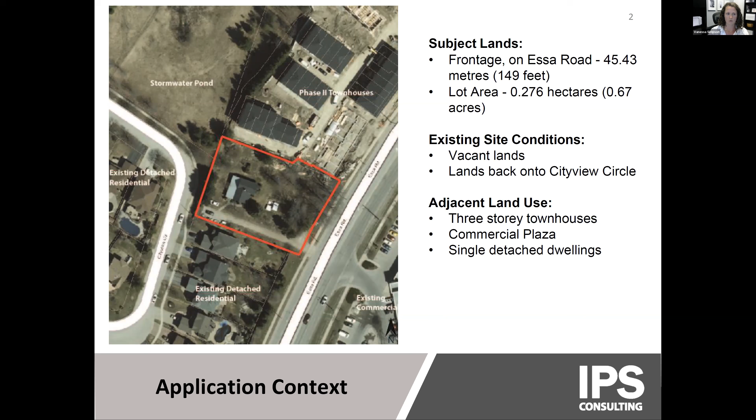As Michelle noted, most of us know there is some history on this site, and I'm briefly going to highlight some of this background information. A zoning bylaw amendment was submitted in October 2017. This was to rezone the lands to RM2 with special provisions. The proposal was for a concept with 16 townhouses, ranging from 3 to 4 stories in height, with a density of 60 units per hectare. This application was approved by the city in 2018, and later the decision was appealed. Then, as Michelle noted, it was approved at the LPAT in March 2021.

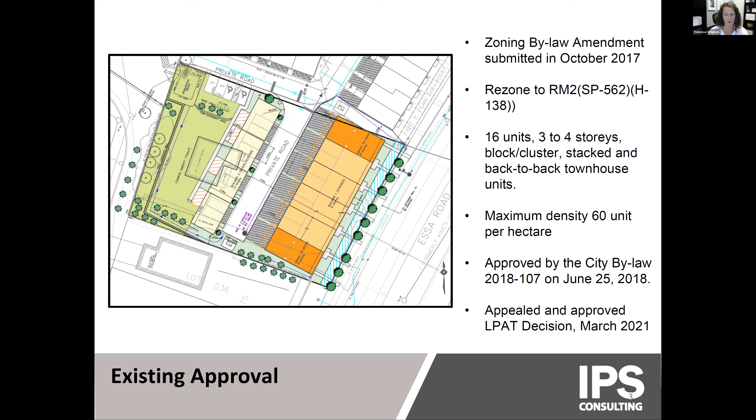This is the neighborhood and surrounding area for the subject lands. The subject lands are shown in red. As many know, Essa Road is identified as an intensification corridor. So you can see Essa here, and this is Veterans turning into Ferndale. It's an area that has seen redevelopment and intensification in recent years and will continue to into the future. The neighborhood area shown here has a wide range of uses, including residential uses from 2-story single detached dwellings to 8-story mixed use buildings.

There are a number of 6-story condominium buildings approved and/or developed already along the Essa Road corridor. We have the Pratt development, and also a couple of 6-story residential projects approved on the other side of Essa Road that have not started construction yet but have been approved. At the intersection of Essa, Ferndale, and Veterans, we have 6-story and 8-story mixed use buildings proposed. There's also the commercial plaza, which provides a number of amenities to the neighboring area.

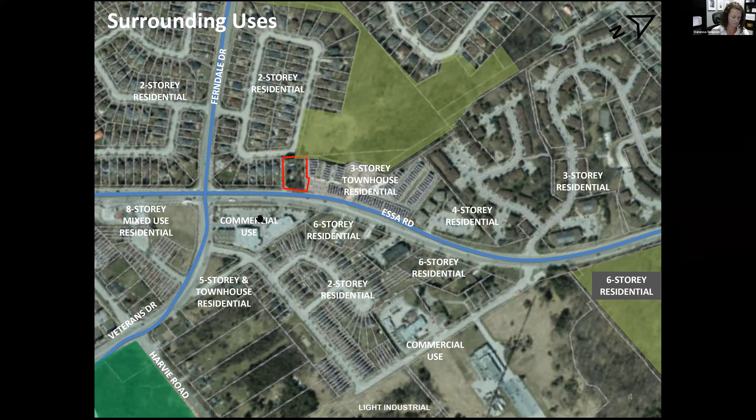This is one of the applications recently approved, 390 Essa Road. It's directly across the street from the subject lands, and it's approved for a 6-story apartment building containing 74 dwelling units, a density of 220 units per hectare, with 7 affordable units. The site provides surface parking, 1 space per unit, and a reduced ratio of 0.6 spaces per affordable unit.

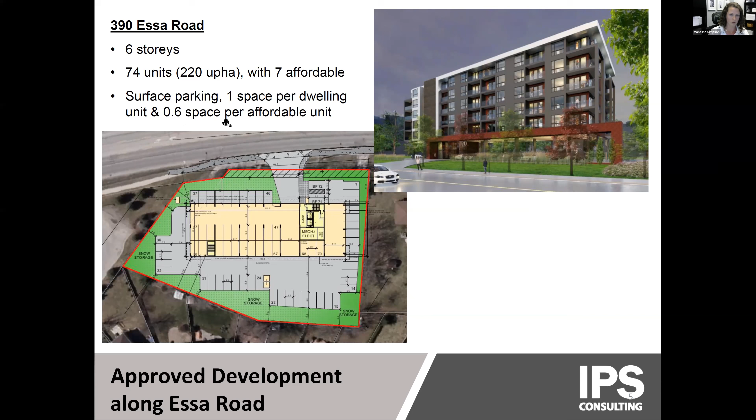This is the concept that has been approved for 440 Essa Road, just south of the intersection of Veterans, Ferndale, and Essa. It's been approved for an 8-story mixed-use building, providing ground floor commercial use and 7 stories of residential use containing 194 units with a density of 387 units per hectare. The site provides some surface parking, but also underground parking with a ratio of 1 space per unit.

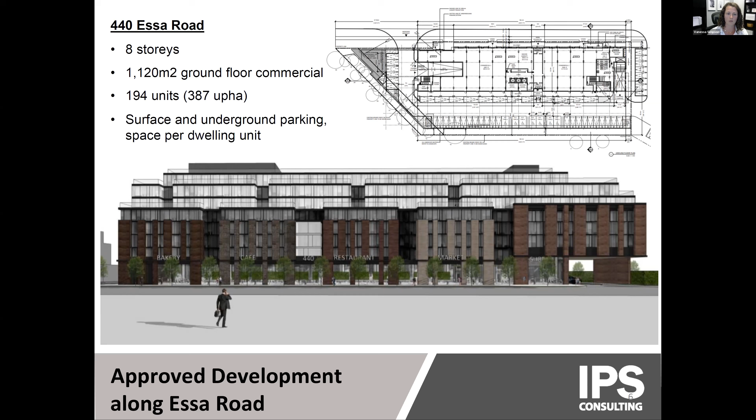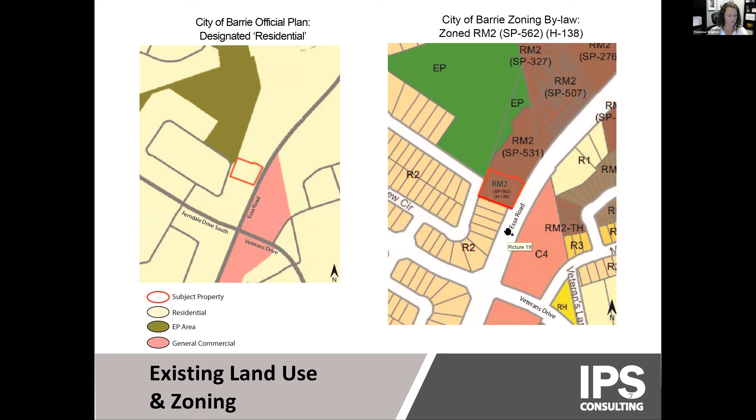The existing land use designation is residential, with the existing zoning being RM2 with special provision. This illustration provides the building elevation for the proposed development fronting Essa, showing the view along the Essa Road corridor. The development includes 8 stories, providing 115 units, which include 6 townhouse units, 103 condominium units, and 6 mixed-use units.

It is intended that 15% of the housing units will be affordable units. 100 parking spaces are provided, which are mostly covered or underground parking spaces. The building features stepped back building heights, which can be seen here in these steps. This is what the steps are when we refer to that language, and you'll see more of that in the images coming up.

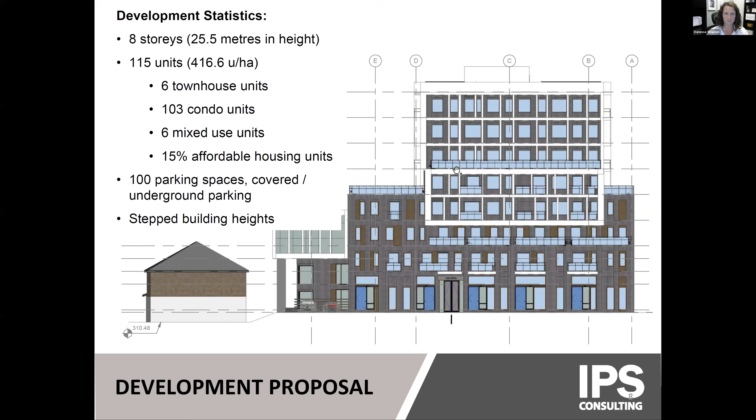So this is a site plan. It's rather schematic, just to demonstrate the layout of the site. These are the townhouses - they'd be 3 stories in height and they front Cityview. These units in purple are the mixed use units - they front Essa and are 2 stories in height.

The apartment building is within the center of the site, which also extends on top of the mixed use units - it would come on top of these units. You'll see it better in the next illustration. It provides a step back in the height as the building increases. The entrance is off Essa Road, and there's an outdoor amenity area. In addition, there is indoor amenity area provided on a number of the floors throughout the building, as well as outdoor rooftop amenity areas.

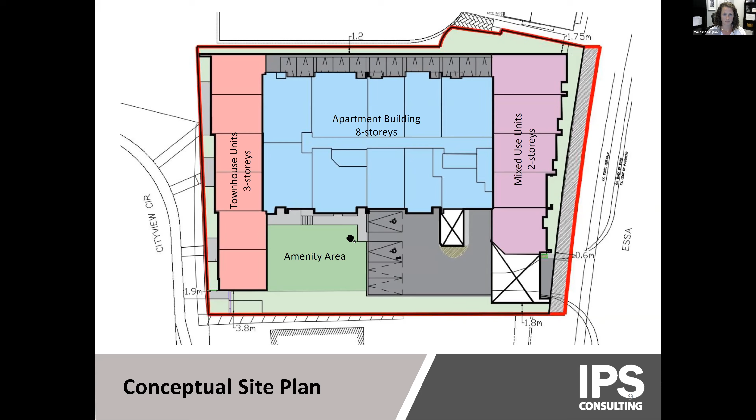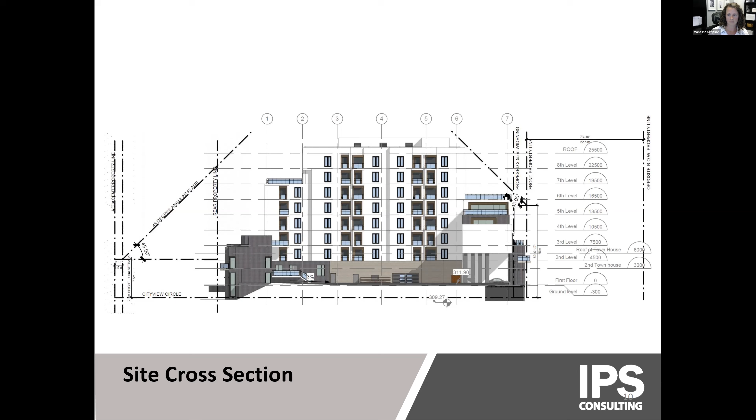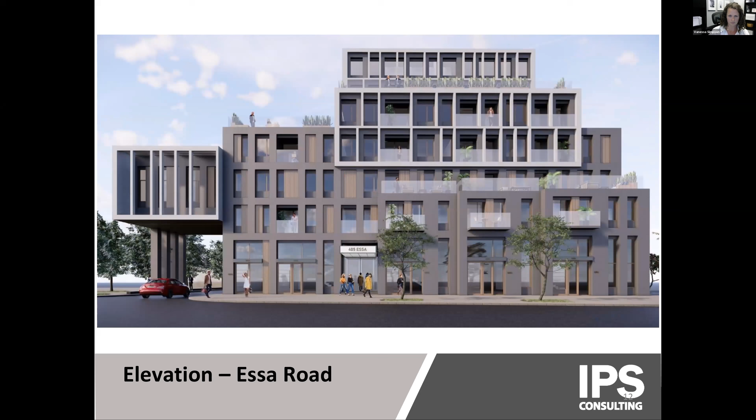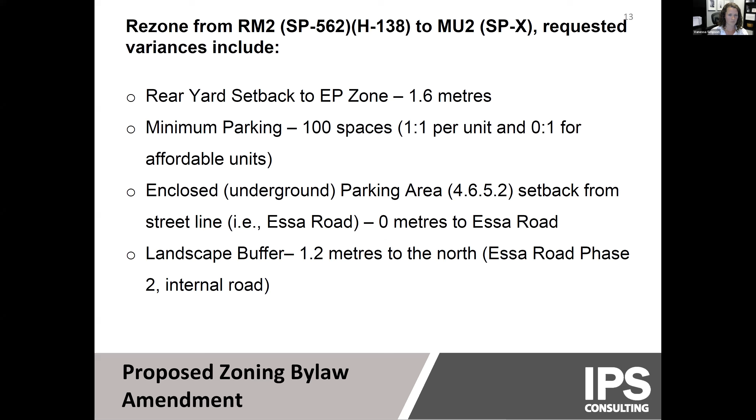So just to highlight a little bit of policy information. Policy is key for this development and has been reviewed to ensure conformity. The official plan provides policy which supports the application.

Locational criteria encourages medium and high density residential development along intensification nodes and corridors such as Essa Road. The site is adjacent to an arterial road, that being Essa Road. It's in close proximity to transit and facilities such as schools, parks, and commercial development, all of which fall into the locational criteria where higher medium density is proposed.

In addition, municipal services such as roads, sewers, and water mains are required, which are provided along the Essa Road corridor.

The second section of policy that's important to highlight is the intensification policies, achieved through residential conversion, infill, and redevelopment to promote an increase in planned built densities and to achieve a desirable compact urban form. Intensification will contribute to development that is more compact and will efficiently use the land and resources, optimize the use of existing and new infrastructure and services, support public transit and active transportation, and contribute to improving air quality and promoting energy efficiency.